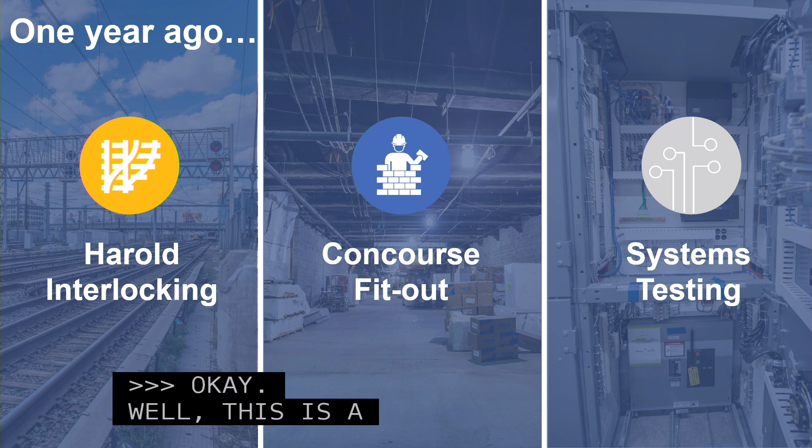Well, this is a year ago, and it was at this meeting a year ago I came to you and reported that, as requested by the board, we'd taken a hard look at the project from a budget and schedule standpoint. The results of that review were not good. The issues that had plagued the budget for years were again threatening to push out the schedule and explode the budget.

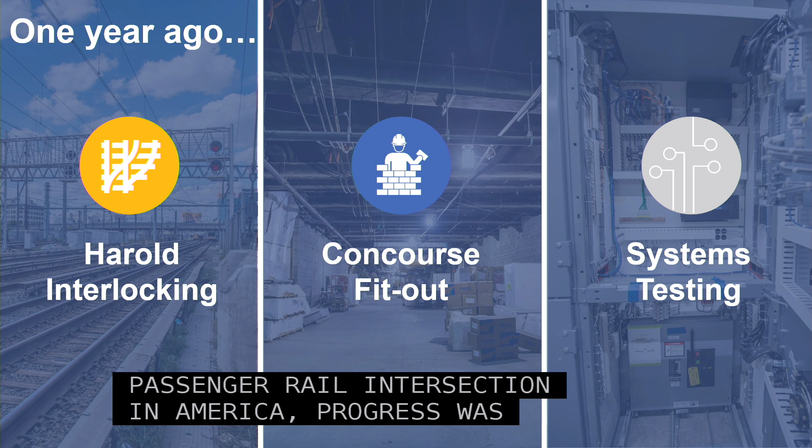Specifically, and to provide a contrast with how far we've come, at Harold Interlocking, the busiest passenger rail intersection in America, progress was stalled, mostly due to Amtrak's inability or unwillingness to provide personnel required for much of that work to take place.

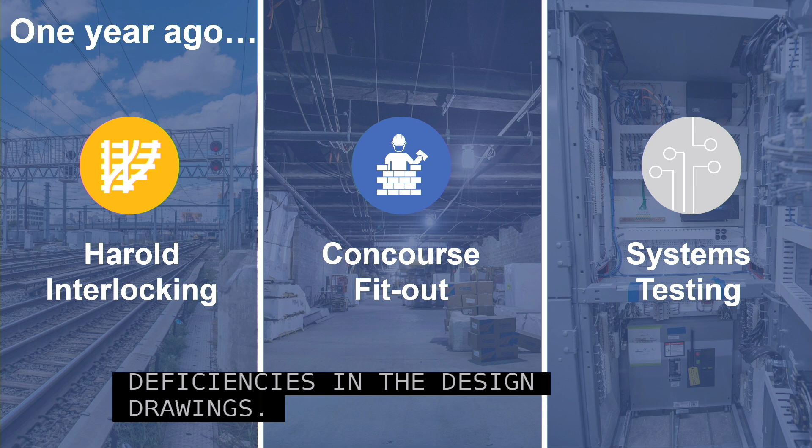Construction and fit out of the new concourse below Grand Central was behind, owing in large part to serious errors and deficiencies in the design drawings. That is a problem that weighs largely on the MTA, and it is of 20 years vintage. It's a very old problem, but with very big consequences.

Vital aspects of the complicated 29 separate systems work, 30,000 separate devices involved in that, was stuck, and as a result, testing was not moving forward as it should. And the lack of productivity and all these schedule delays combined were translating into increased costs.

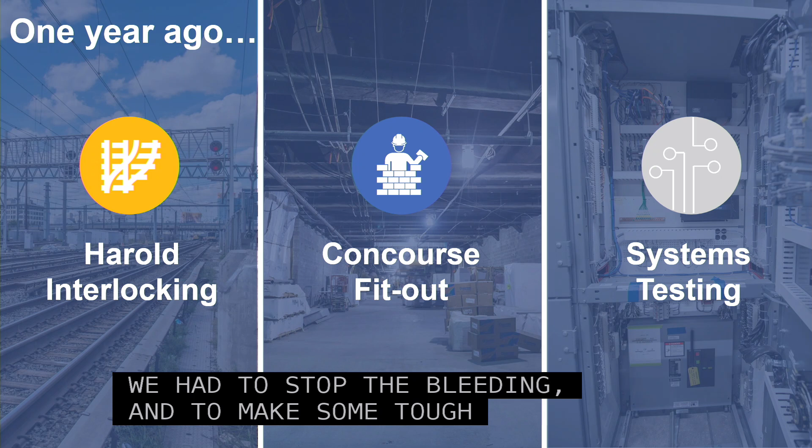We had to stop the bleeding and to make some tough decisions. So after a review and after discussion with the board, we recommended that we recommit to the December 2022 revenue service date, which was under pressure, but which I believe then and I believe now is accomplishable. And we had to acknowledge the cost of some of the problems that I've enumerated.

The plan was met with overall a very positive response from opinion leaders on Long Island. Our new commissioner, Mr. Law, was very much part of our effort to socialize the information about what this project is, why it's significant, and what it will accomplish.

So quickly today, I'm going to play for you a video of the progress in photograph with dates before and after dates, so you can date it.

So in order, as I discussed this morning, we made significant organizational changes to support the schedule, and we detailed the schedule. I cannot emphasize how important this is.

We went from a 15,000 activity schedule to a 57,000 activity schedule. This allows us to really identify all of the issues that could derail the project, however small. So that is a significant step forward.

And I talked to you a little bit about the organizational changes we made, but the results have been significant. We have a 70% reduction in the time it takes to resolve and execute change orders. The backlog of change orders was 500 in number, that I described last year, is down, reduced by 91%.

And the hundreds of submittals that were waiting for review by our team and by our design team for more than 30 days, outdated submittals, have been reduced by 81%. Colleagues, that's an incredible achievement.

Another area of success, and I have to give credit to Amtrak, because we were very clear with you and with the public that Amtrak's failure to support this project, even though we're paying for every nickel of their time and their workforce, was a serious detriment to the schedule. And we called it out, and we talked to them about it, and they have stepped up. It's not perfect, but significant improvements have been made. And the results are dramatic.

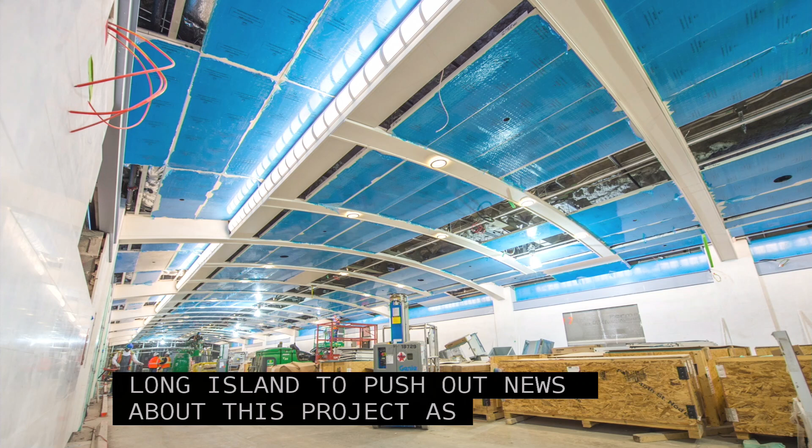People are seeing, as Commissioner Mitzker said this morning, when you see this project, it takes your breath away. Nobody has opened an 8-track railroad terminal in the United States since the early 50s. This is a historic effort. It obviously has a history of challenges and problems, but let us not miss the punchline, which is we're moving towards opening a historic mega facility.

So I want to invite you again to come, and we will set up some times for board members to see it. Finally, I just want to emphasize something that goes to what Pat, the chairman, said at the outset, which is we are taking the lessons of some of the projects that had challenges, Second Avenue Phase 1, East Side Access in the past, and also learning from projects that are going great, like Third Track.

About what we do: we're saying no to scope creep. We are not engaging any discretionary design changes. We've cut back on the red tape, which is how we've accomplished those metrics that I described to you. And we're learning how to better execute all of these projects so that we can deliver for the people of Long Island.

Highlights of the construction progress so far, there's so many, I'm just going to touch on a couple. We completed substantial completion of the 57D Harold Track contract. Today, we are hitting substantial completion for 2 other major contracts, the so-called 006 contract and the CM32 contract. These are 250 and roughly 300 million dollar, and 200-plus million dollar contracts themselves. So we are closing out contracts and hitting milestones on all of the various contracts, so that we're down to just the systems testing and the work in the concourse and a little work in Harold.

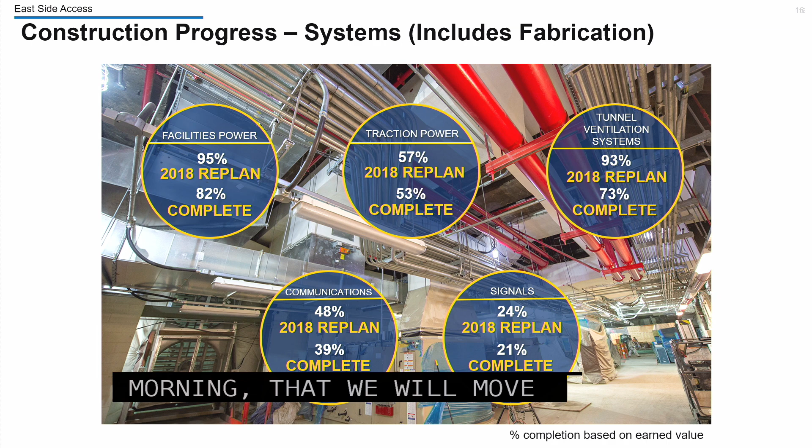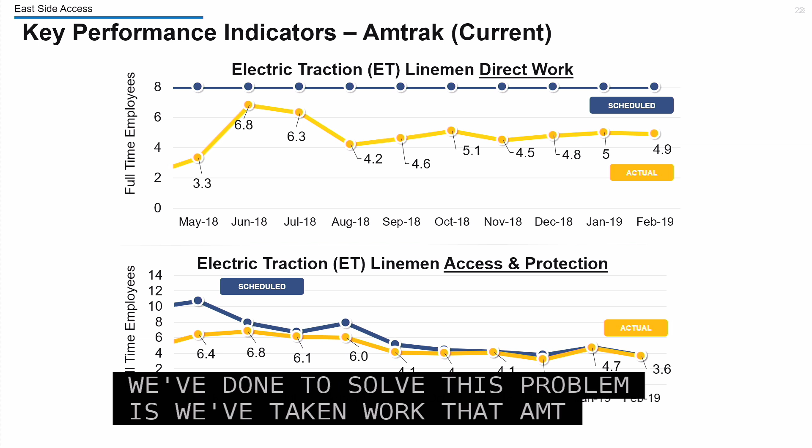Finally, the old trend with Amtrak, I'm not going to get into it, but it's moved in the right direction. We still have a little way to go. One of the things we've done to solve this problem is we've taken work that Amtrak used to insist on doing, and we're taking it for ourselves. We're doing a design-build contract with our own contractors. We were going to pay for it if Amtrak was going to do it, so we'd rather have control of the work, and we've done that with some of the electric traction power work.

Rob, can you comment on the 90-day look ahead? Certainly. So looking ahead over the next 90 days, we will energize 2 additional facility power substations, and these will provide the necessary power that allows system testing to move forward.

Factory acceptance testing of the tunnel SCADA is critical to the fire and life safety system, and it's also an important component of what is the integrated incremental systems testing.

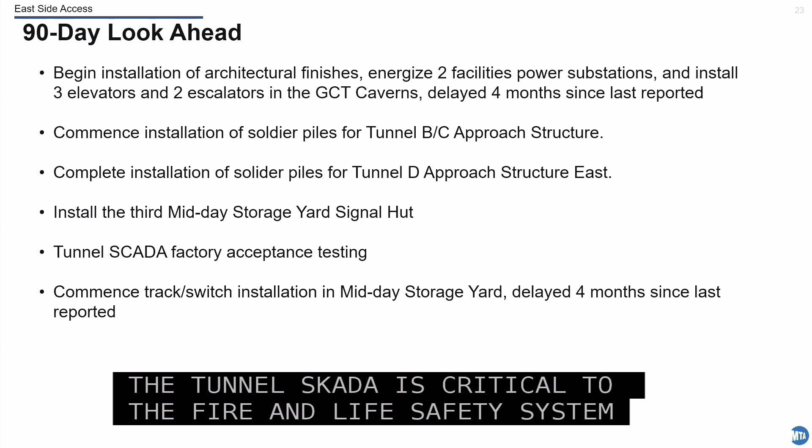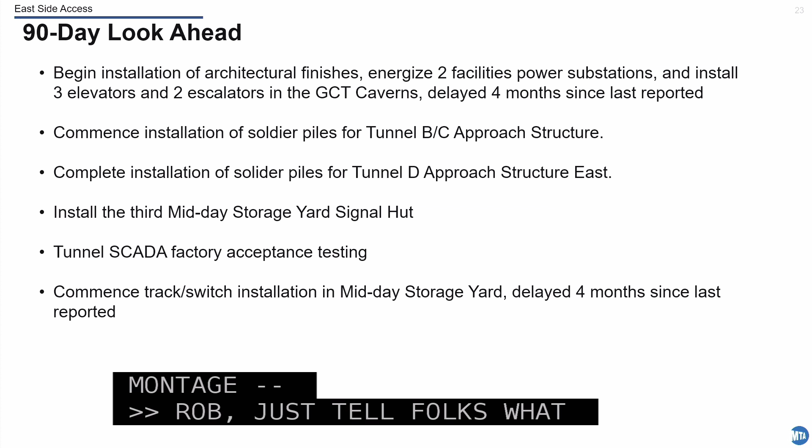As you saw in the video montage... Hey Rob, just tell folks what SCADA is. So SCADA is data information back and forth that provides information to control systems out in the field and provides it back into the control center. So like a traction power substation, you can control the breakers. A signal system, you can control the signal networks through the SCADA system.

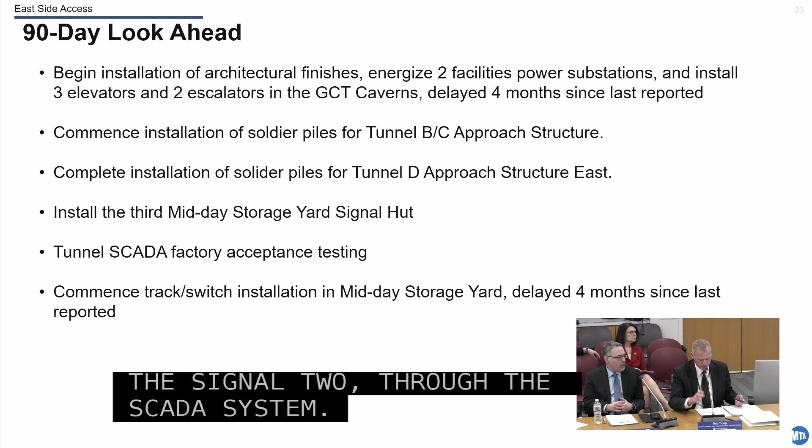And as you saw in the video montage, the installation of tracks and switches in the midday storage yard has now commenced.

So as we presented at the committee meetings this morning, we have negotiated, after a year, modifications with the CS-179 systems and the CM-014B concourse contractors. This takes care of a variety of issues, most importantly, the agreement on the incremental systems testing approach. The approval of these modifications at the board meeting Wednesday provides for a clear path forward to help ensure that we meet that 2022 service date.

For the issues identified here, the board has approved the modifications that will address the start of the Phase 3 incremental systems testing. Moving this prioritized mods forward is a really good example of what the PMO, the program management oversight, brings to the project. When we prioritize the work that is critical, we're able to execute on those priorities in a timely fashion, reduce the risk, and most importantly, maintain schedule.

Delays to the factory acceptance testing of the backbone communication system risk a cascading set of delays to the multiple discrete systems that ride on this backbone, like the SCADA system. We are working very closely with the contractor to mitigate these issues.

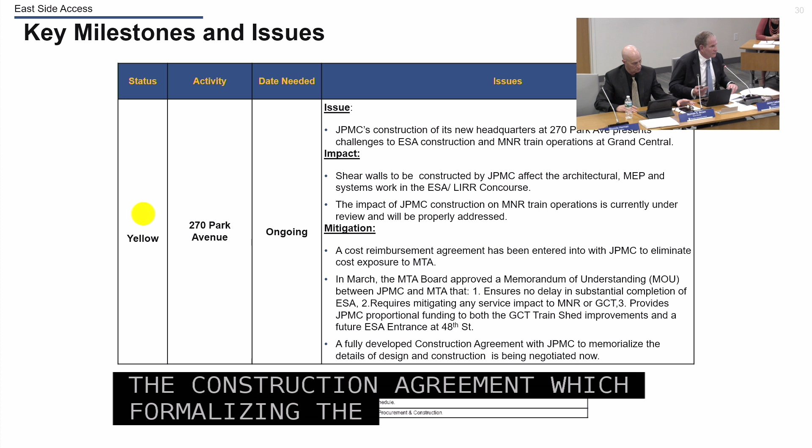The MOU between JPMorgan Chase and the MTA has been approved by the board. I'll just add a note that we've actually advanced it. We now are exchanging drafts of the construction agreement, which formalizes the principles in the MOU, and they've delivered us a much more developed design. So this thing is going forward quickly.

So as we approach revenue service, Long Island Railroad operational readiness and the rail activation plan, in other words, what it takes for Long Island Railroad to get ready to run service, will become a more significant area of focus. As of a few weeks ago, the LIRR now fully owns and has responsibility for the operational readiness and asset management teams, which had previously resided with ESA.

There's a lot of elements to this, and among those are the operational readiness. It's things such as simply the opening day service plan, the maintenance and facility service planning, systems acceptance, public information and communications, the hiring and training of the multiple crafts and disciplines which require Long Island Railroad to run the service. I am pleased to report that's on an increasingly positive track, but that must be maintained and be looked at very, very closely.

But I guarantee you that Long Island Railroad is committed to providing a world-class passenger experience starting on day one of service to GCT, and executing a highly developed operational readiness plan helps to ensure that this is achieved. Thank you, that's our report.

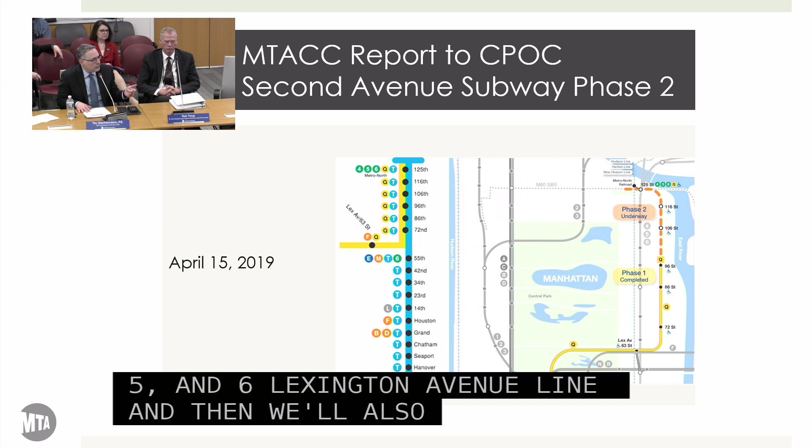So I want to talk about our federal funding and our application for federal funds. The future of this project lies in Washington. We are looking for a substantial amount of federal funding for this project, similar to what we had on phase 1. So roughly around 33%, or a third of the project cost, we've asked for in federal grants.

We started with a $6 billion cost when we entered project development approximately 2 years ago. We developed that cost as a placeholder from looking at what phase 1 cost us, then applying escalation since we had similar construction and scope of work, and we came up with a starting point of $6 billion. Right now, based on our preliminary engineering and some cost pressures and substantial cost containment efforts, the project is somewhere between $5.5 and $6 billion. But we know we're not done with cost containment. We have a long way to go, and we want to get that cost down further.

We're carrying a goal of a federal funding agreement as early as the end of 2020. We've completed our supplemental environmental assessment and received the finding of no significant impact this past November. We've submitted documents to the FTA to support their risk assessment and their evaluation of our readiness to enter the next phase of engineering. We're thankful for the strong support from our local New York delegation and congressional representatives, especially Congressman Espaillat, who's dedicated to seeing this project get the federal funding it needs so we can move forward into construction.

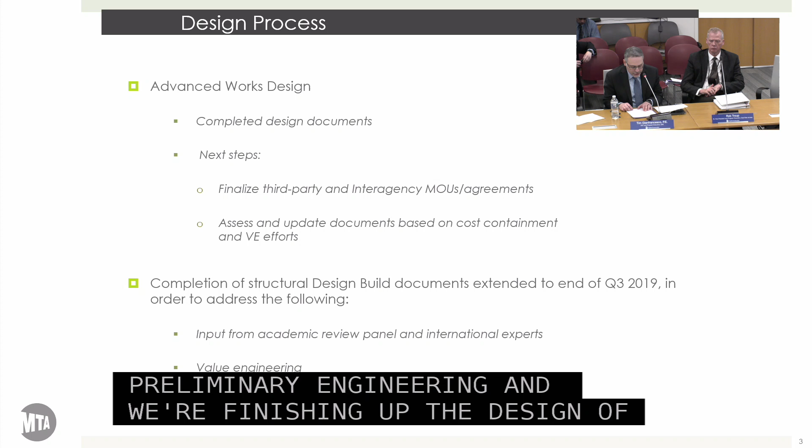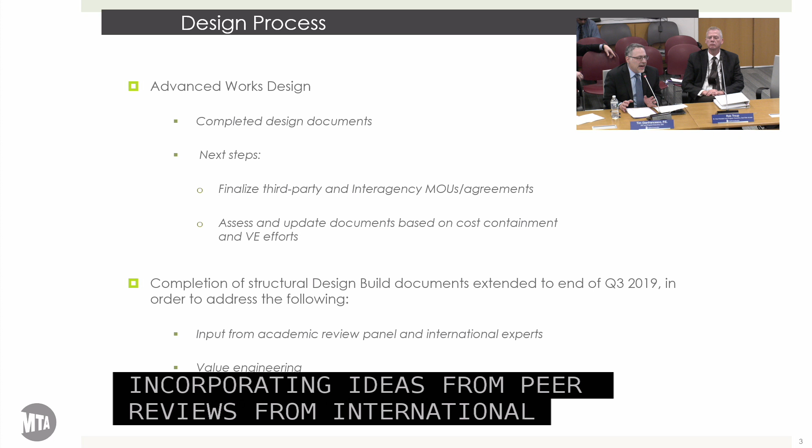Since we restarted design in 2017, we've completed preliminary engineering and we're finishing up the design of an advanced works package and an early utility package. We're now focused on incorporating ideas from peer reviews by international experts, our value engineering efforts, and engaging with the academic review panel. We want to make this project less expensive, but just as effective.

Now to some of the good stuff. One of the major cost containment ideas we've advanced during preliminary engineering is the reuse of the existing tunnel section that was constructed in the 1970s for the 116th Street station.

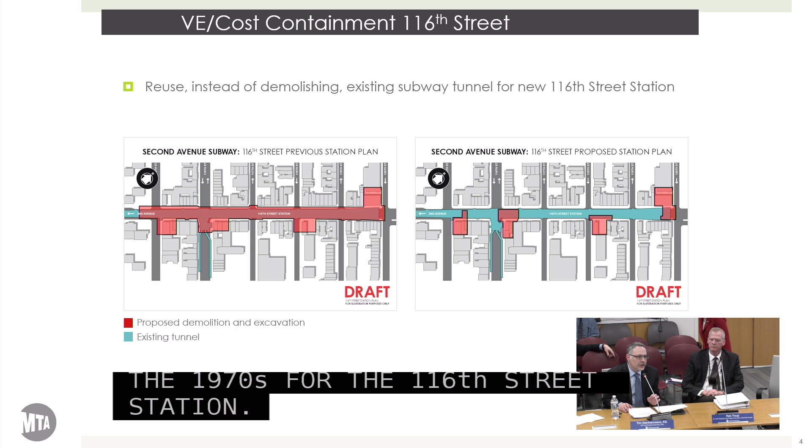What you see there is a picture. On the left-hand side is the original preliminary engineering concept for the 116th Street station — basically 5 blocks shown in pink, representing excavation and demolition of the existing structure. On the right-hand side is the new concept we've developed and will develop further in preliminary engineering, where we can maintain and reuse most of the existing box, with the pink areas showing where we connect into the box with new entrances and new ancillary structures.

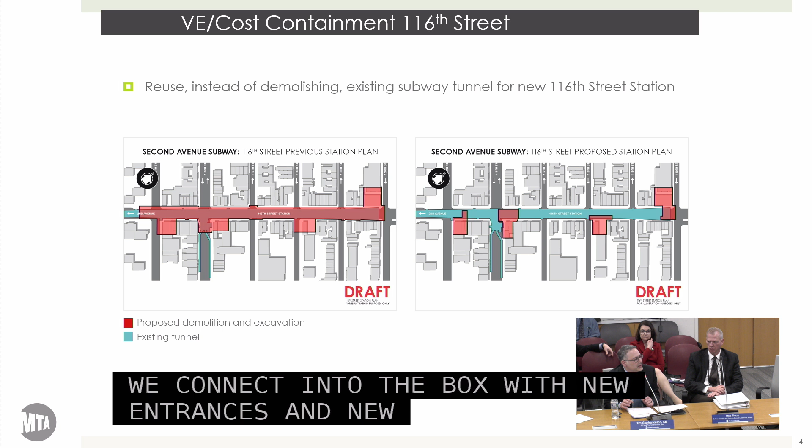We were able to do this because back in the 1970s, when they constructed that existing box, they were anticipating being able to inspect the trains along the route. So where they installed an inspection track in the middle of the two existing running tunnels, we figured we could fit an island platform in that spot. Since we don't inspect trains on the right-of-way anymore, we can fit an island platform right there and do some reframing. We'll have some columns within the station, which is a departure from previous Second Avenue standards, but we'll be able to minimize the excavation — probably the most expensive activity we do when building these new tunnels and structures.

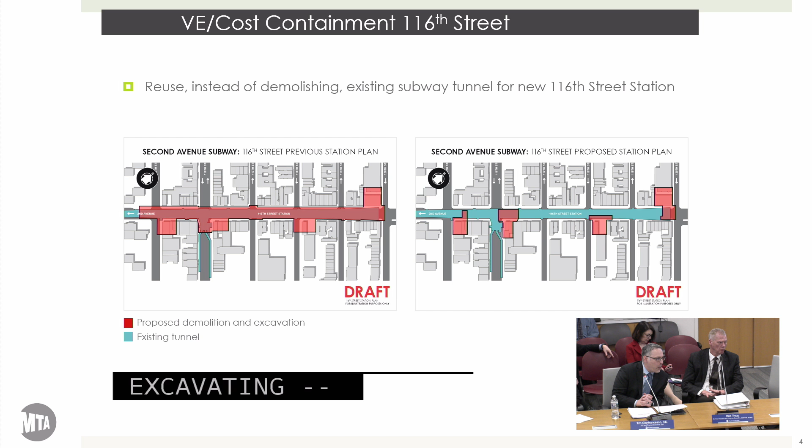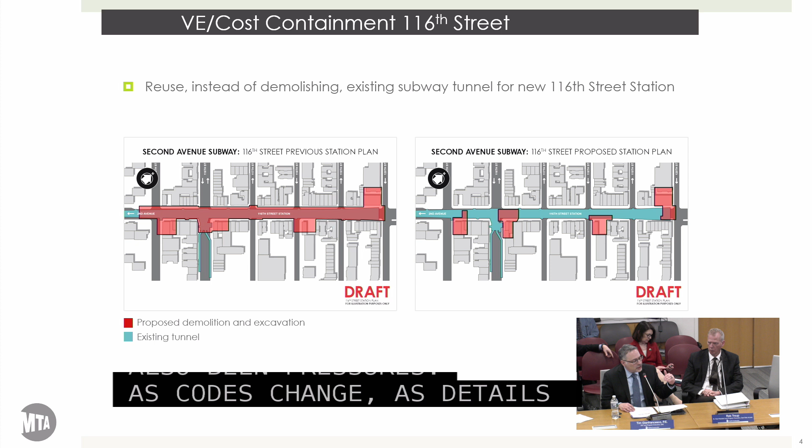So, Tim, I'm curious — great stuff — how much do you estimate the cost savings to the MTA from these improvements or this new approach? Hundreds of millions. This particular issue, we believe, is in the area of $500 million. And that's on top of the additional reduction in scope you've already achieved? Yes, there's been reductions. There's also been pressures as codes change and details change — the project is always fluctuating a little bit up and down.

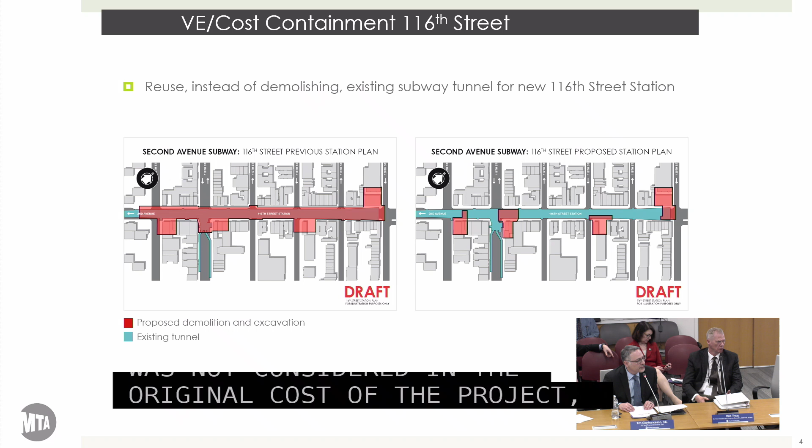So this is something that was not considered in the original cost of the project, these savings. I'm just curious, last question — what's your ballpark estimate as to the savings to the MTA from using the existing tunnel and the other things you've done? Close to $1 billion. It's pretty good.

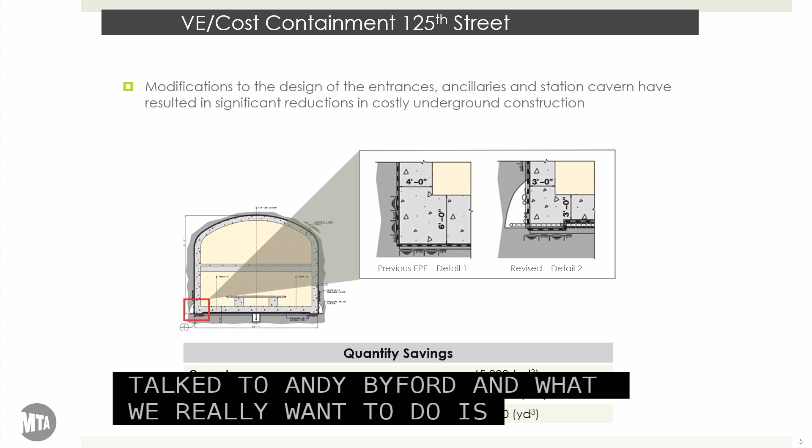Thank you. And at this stage, I've talked to Andy Byford, and what we really want to do is put all of the transit discipline professionals and the team together to really hack away at scope and try to bring the cost down further. This is consistent with our cost containment principles — simplify, decustomize, use off-the-shelf solutions, and generally reduce scope. So this is the moment, while we're waiting for the federal funds, to hopefully do that.

Tim, did the 1970s version of this tunnel always envision an island platform at 116th Street? The 1970s version didn't envision a station at 116th Street at all? At all. They were going to bypass an important crosstown street like 116th Street? They were going to bypass it.

It was in 2004 when we restarted the design and concept of Second Avenue Subway that we identified a station at 116th. And the last question is, do today's and future car types allow for the same clearances as what was allowed for in the 70s there? Yes, absolutely. We meet all of today's standards on the new design.

So the last slide I have is another roll-up, an example of the savings we've achieved at the 125th Street area. This is a general slide to show we've addressed entrance designs, ancillary system designs, and the design of the cavern itself to minimize the amount of excavation. In particular here at 125th, this is all rock excavation.

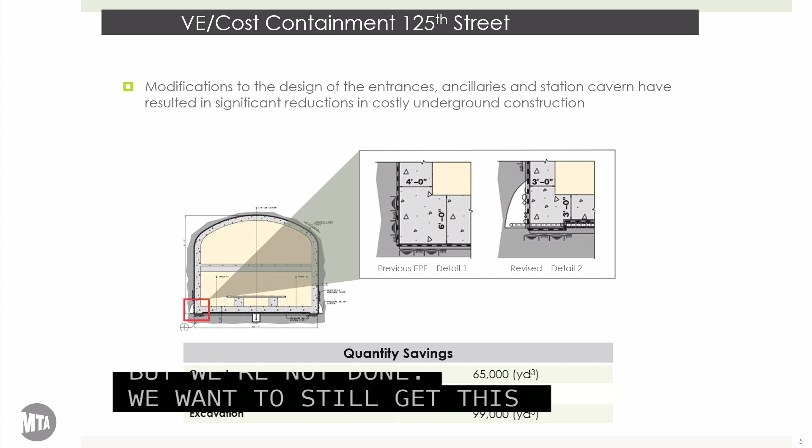Good afternoon, Mr. Chairman. I have a couple of remarks summarizing our observations on this program. First, the project has maintained its goal to complete the federal funding process by the fourth quarter of 2020. They've done that by completing the key submissions of required project development materials to the FTA last month, and by setting a schedule for completing a readiness review for starting engineering by mid-year. Secondly, the proposal we just discussed to fully reuse the existing tunnel really demonstrates the project's commitment to an aggressive cost containment program. Those are my remarks.

What's the IEC's value added on this project over this kind of period of time since the last CPOC board meeting?

Good question. Certainly we've had several points of influence. I'll start by saying floor space is one of the more generally understood drivers of cost in this kind of construction. Our observation of the development plans last June found that a significant amount of space was being allocated for transit user group operations, maintenance, and support facilities — back office, as it's commonly termed in our business. We raised some questions, and then recommended that be looked at again under closer review, since in this particular case at 125th Street, we thought there were opportunities above ground for those sorts of facilities, or even at 96th Street, the existing terminal, once it becomes reconfigured as a line station instead of a terminal.

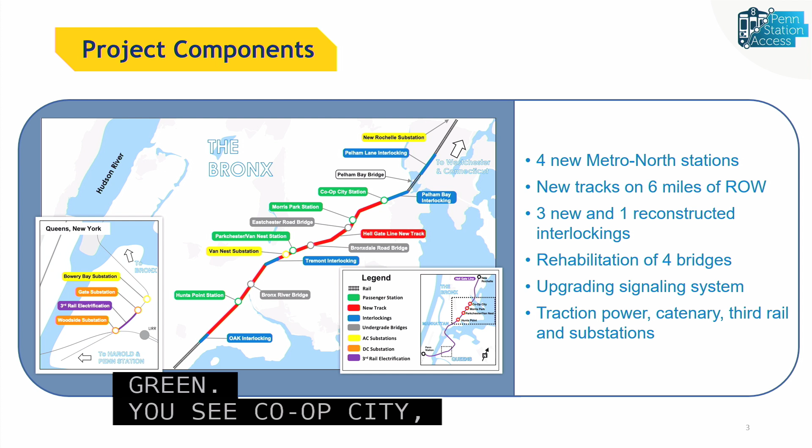In order to accommodate these stations, we'll need to add additional track. The red line is the 6 miles of additional track that will be added as part of the project. Also included are a number of new interlockings, which will allow us to connect back to the original rail. Part of this project will necessitate additional power and signal work, all of which will be included.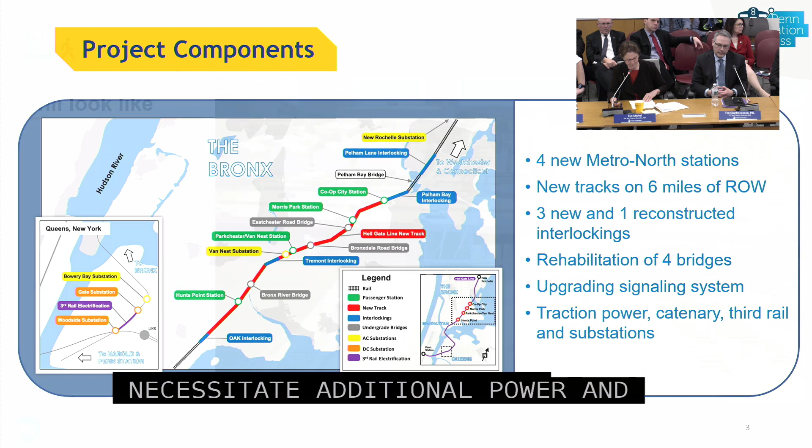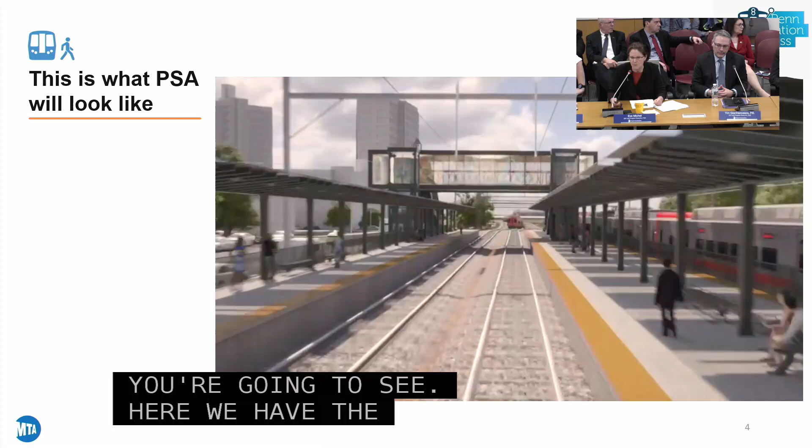So this is a sneak preview of what you're going to see. Here we have the Metro North train coming into the Co-op City station. Above you is the pedestrian overpass that customers will use. As we turn around here, a passenger arriving at the station will come and access the platforms.

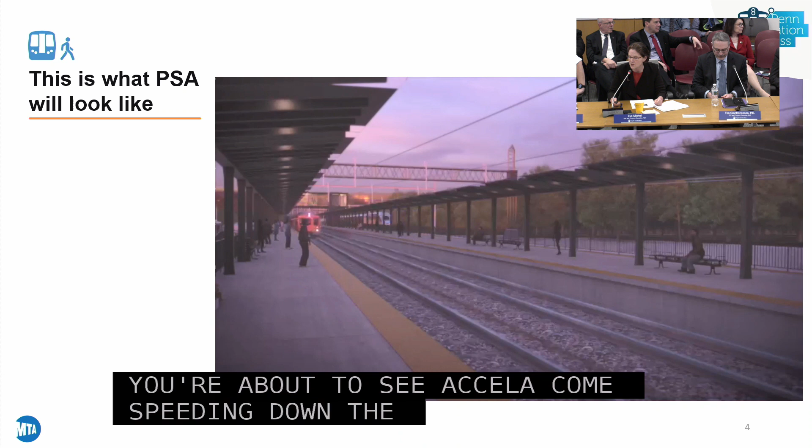If you look up, you'll get a preview of what some of the artwork might look like in the station overpasses. This is an active Amtrak right-of-way. You're about to see an Acela come speeding down the right-of-way. And here we have our M8s coming to collect passengers. Our passengers from here will either go into New York City or, as mentioned, up to Connecticut and Westchester.

This is an exciting time for the project. We've actually had a lot of major accomplishments. We have signed the Memorandum of Understanding with Amtrak. This was hard won, but it has allowed Metro North permission to travel along the active Hell Gate line, which is an Amtrak right-of-way.

We've also gotten the MTA approval for the general engineering consultant contract. We've started work with HNTB on this contract, and issued them a notice to proceed on February 12th. We've also started having our key stakeholder kickoff meetings, meeting with Metro North, Amtrak, and Long Island Railroad.

We're starting the actual work. Survey work started on Friday and has continued over the weekend, both on the right-of-way and on the adjacent areas. As part of the survey work, we're using LiDAR equipment, which will allow us to capture information used and translated into the project documents. This will feed the BIM, the 3D drafting, which will become part of the project components.

A few words about the stakeholders. This project is being run, as you know, under the auspices of MTA Capital Construction. Our key stakeholder clearly is Amtrak because this is their right-of-way along the Hell Gate line. Metro North is our client; they will be activating these 4 new stations in the Bronx for their customers. This is the first major expansion on the Metro North Railroad in many years.

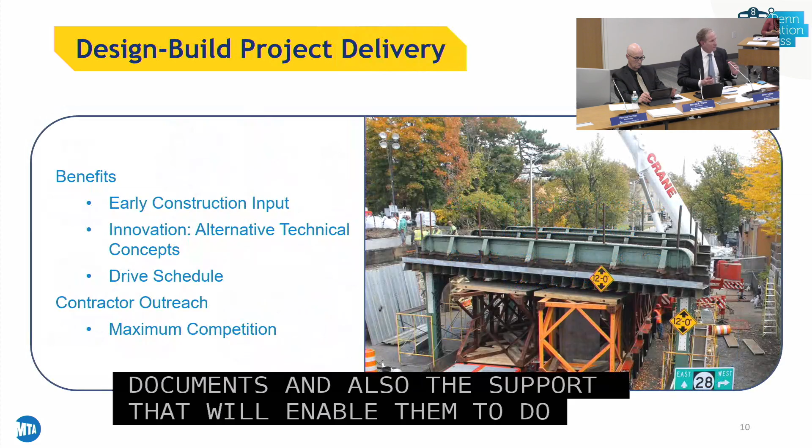Just to remind you, submittal turnaround time was such a big deal because the volume is so great. Now we're dealing with an outside agency that reviews all the submittals, Amtrak. So we're trying to work with them to see if we can help expedite their reviews by providing both the caliber of document and the support that will enable them to do it, and this kind of over-the-shoulder dialogue, which cuts short the back and forth that frequently is part of the submittal review process.

Sorry, I thought I could get back to that slide.

We also are going to be driving cost containment principles that have been talked about to the MTA board. In particular, we're going to do tight management of scope. This will allow us to drive schedule, but also to contain the costs as we move forward.

We recognize that this project has many complexities. We're working with a new railroad, and we're also within this high-speed right-of-way. We are going to do this through the project design-build project delivery system, and there are many benefits for us. We are going to be able to get early construction input from the construction community. We will enjoy some of the innovations we can learn from them with the alternate technical concepts, and we're going to use this to drive schedule.

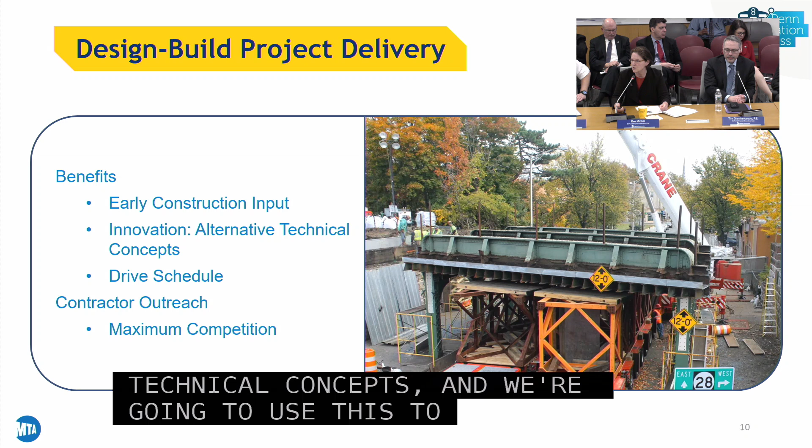We're also starting now with the RFQ. We're going to be preparing and issuing an RFQ at this early stage so that we can go out to the contractor community. It's extremely important to us that we maximize competition for this project.

We're already thinking ahead on how we're going to phase the construction itself. One of the key activities here is to minimize Amtrak's disruption as well as Long Island Railroad's, since they're both on this active right-of-way. We're talking about track outages to accomplish that, and we're also doing some modeling to see whether or not there are single-tracking opportunities available as we move forward.

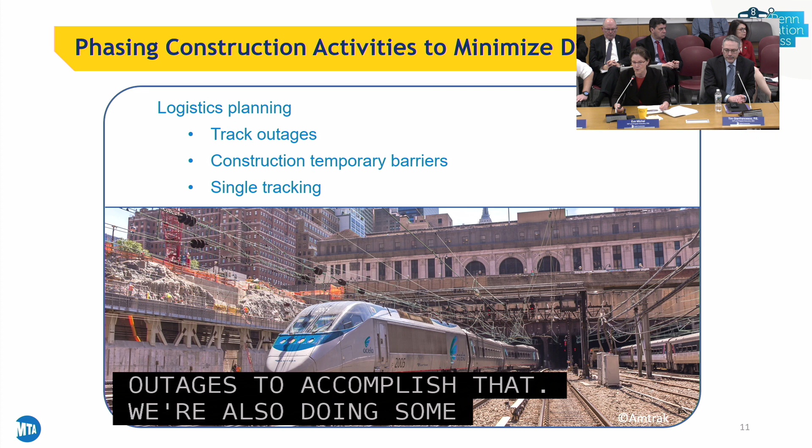Community outreach, sorry? In the opening of this particular project's pages, it mentions traction, power, catenary, and third rail. You're not going to install third rail for this route?

Yes, actually we are. As we enter into Harold, there is a phase break there. Amtrak travels along at 60 hertz, and then they transfer over to 25 hertz as they go through the East River Tunnel. The M8 equipment is not able to make that transition. The M8, however, does have a shoe with an overrunning capacity that needs a third rail. So that juncture, a mile-long juncture as you enter into Harold, will need to have a third rail to bridge that phase break. So that would be the only section of third rail. That's correct.

Incidentally, that also will necessitate DC substations in order to facilitate the third rail.

So a little bit about... yes? Are there no plans to upgrade that 25 cycle section so it can be the same as everything else? Well, Amtrak's equipment does allow both 60 hertz and 25 hertz, whereas the MTA equipment does not.

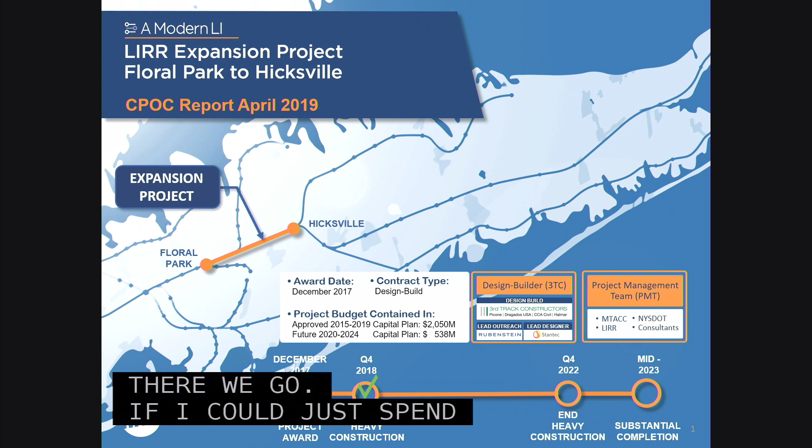If I could just spend a few minutes reintroducing the project to the board members that may be new: it's 9.8 miles in Nassau County. It's got 7 stations, 7 undergrade crossings are going to be built. I say a lot of 7s. There are 3 or 4 new parking garages to be built. It is due to be completed in construction in October of 2022. We started our construction back in October of 18. We have 4 years to do the construction, and that's the commitment we've made to the local community.

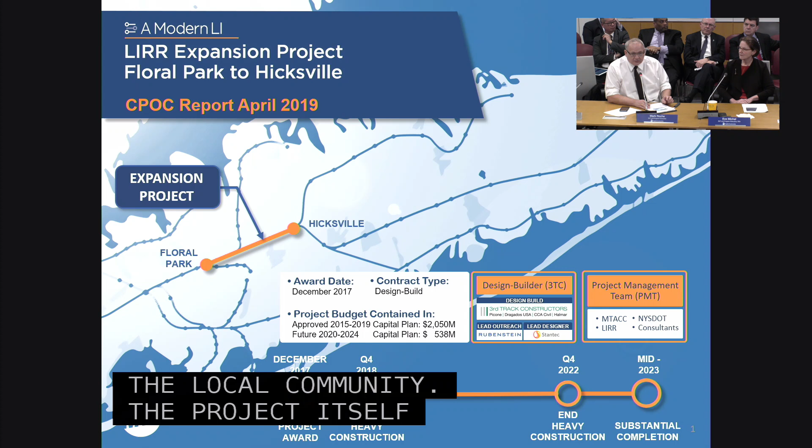The project itself increases the capacity of the double track by adding the 3rd track by 45%. That's a huge increase. But not only that, it provides the ability for reverse commuting in the corridor, which is not possible right now. Those are 2 major benefits of the project. As you can see by the numbers, October 2022, we're finishing at approximately the same time as East Side Access. Total project cost is $2.58 billion, of which $538 million is in the next capital plan.

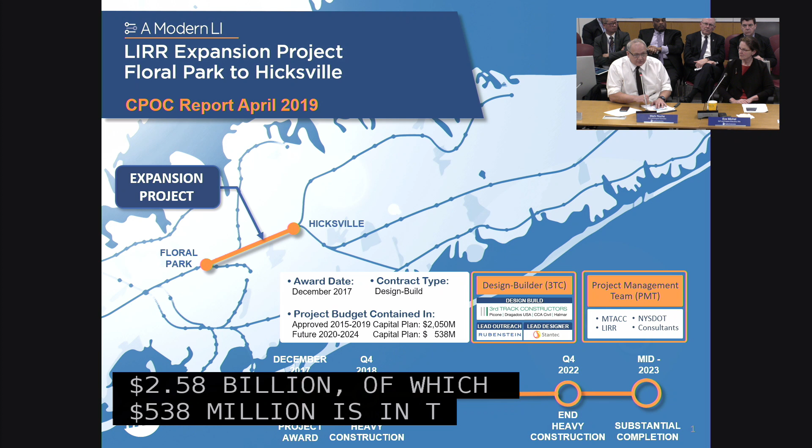That is beginning to be an issue. I'll highlight some of that as we go forward. $2.05 billion is currently funded, and that work is well underway. $270 million of that future funding is allocated to the design build contractor, 3rd Track Constructors. Our contract requires that amount be awarded before July of next year to make sure we stay on schedule and on budget, and I'd like to remind the board about that.

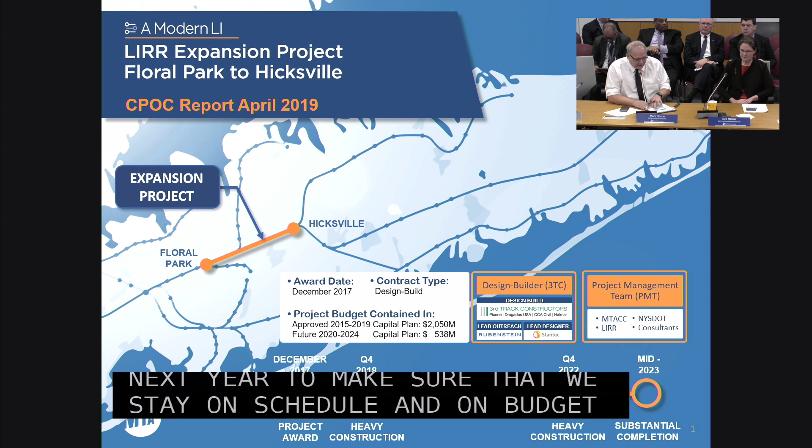A couple of namings so that you're familiar as I go through this. 3rd Track Constructors is a consortium of 4 contractors and many designers. I won't go through their names. We use the phrase PMT, Project Management Team, that encompasses all of the agency, DOT, and all our consultants that are supporting us as we go through.

She got it, she's got it.

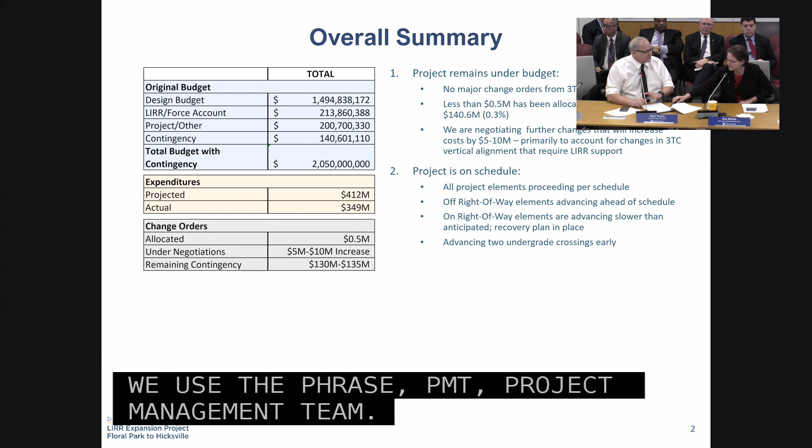Yelena's doing it. Okay, so I'm pleased to present that we are on budget and on schedule. In fact, we are very low on change orders across the whole of the system. We have less than 1% of our allocated budget for change orders necessary at this present time.

We are seeing some means and methods issues from 3rd Track Constructors that are telling us we will need support from Long Island Railroad with more force account or more track raising over the years ahead. So I'm saying there's $5 to $10 million for changes that are going to occur. But in general, of the $140 million in contingency that we have, we've only allocated about 1% of that at this stage. The contractor is moving ahead. I would characterize it as aggressive. They are very detailed and very precise. They've got some very good team members.

We are hoping in the next few weeks to make some changes to the contract that will help them get further ahead on the schedule. I'll talk about that in a moment.

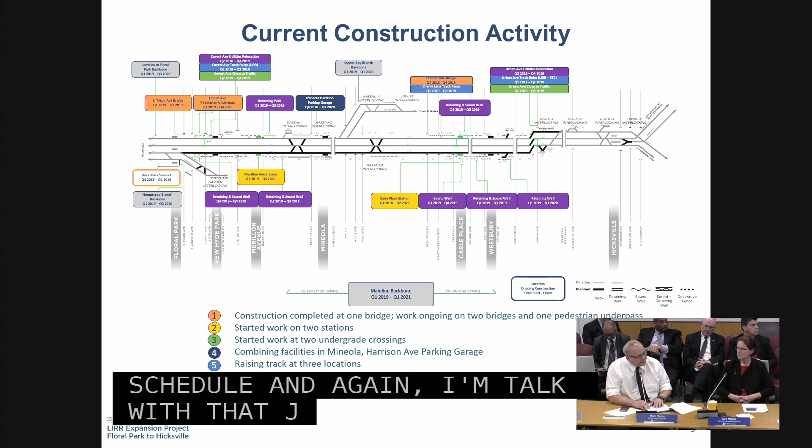If we look at what's currently going on out there right now, I won't go through this in great detail, but I'll give a little summary. There are 3 bridges that we've started this year. One is already complete, which is nice to say. Two more will be complete this year.

We have started work on 2 undergrade crossings. The first was at Urban. The second, which started this morning, is at Covert, and I'm pleased to say that the traffic diversions planned for the closure of that road worked out extremely well today.

We've started work at 2 stations, Merillon Station and Carle Place Station. We've restricted the contractor to work at only 2 stations. If we add a 3rd station, we figure we may get to the point where we affect service, and we don't want to do that. We will watch that as we go forward.

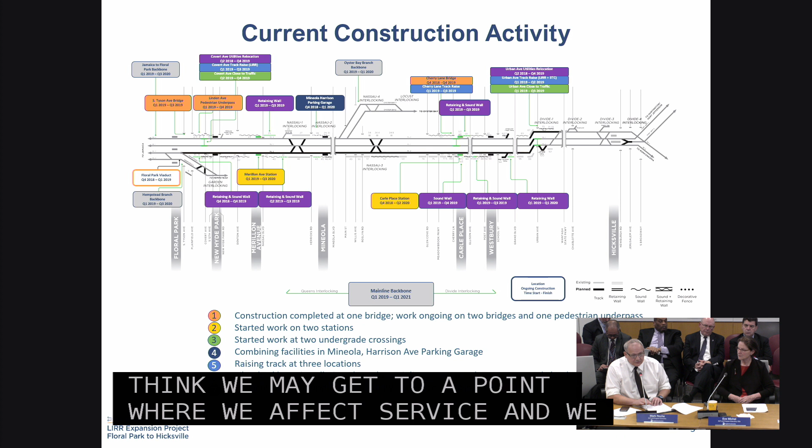Long Island Railroad have a lot of work going on out there right now. They are raising tracks at a number of locations and relocating utilities in many locations. We are seeing, to keep on schedule, that using Long Island Railroad forces as they become available is actually quite an asset to the project, to make sure we're using all the resources that are available.

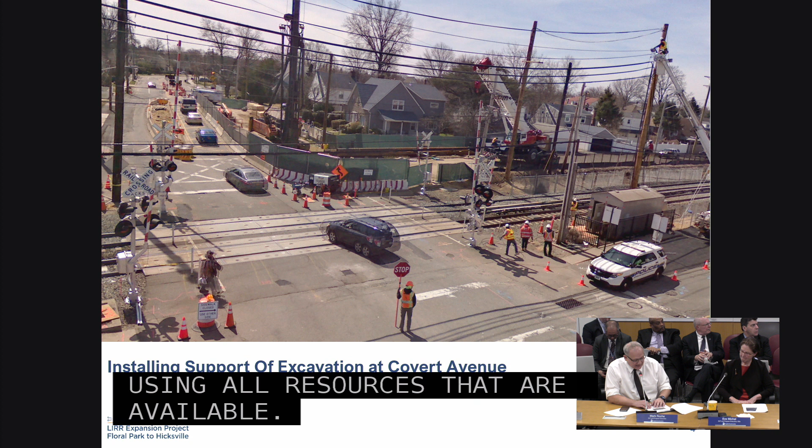Just a couple of photographs of progress out there right now. This was last week at Covert Avenue. That road closed this morning, again with no traffic issues.

I've used the word aggressive regarding 3TC, and I think this illustrates it well. Third Track Constructors only have 6 months to get this road open. By this date in October, they must have that road back in place, or they will be punished with liquidated damages—or if they finish early, we have incentivized them. You can see in the photograph they've got lots of rigs. They've already contained some of the traffic to start getting ahead and putting in some of the piling in the ground to move forward. They are looking at all times at those LDs, driving their behavior, and I am very pleased to say they are well ahead of some of these construction requirements.

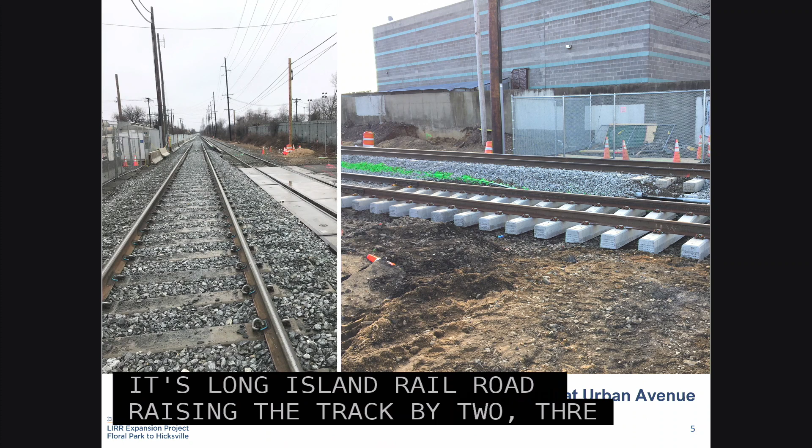The second photograph is a simple one, not sexy, if I could use that phrase. It's Long Island Railroad raising the track by 2, 3, or 4 feet in a number of locations, but it's actually extremely important. By raising the track we can eventually raise the road that goes underneath it, which means we don't have to spread out and bring that road back up as far into the community. So Long Island Railroad's work to raise the track as much as possible, to take advantage of the space and geometry we have, is saving impacts to the community, which is very good to report.

I like this photograph very much. This is Urban Avenue, 1 week after we closed the road on March 9th. One week, and we're already down to the level of where the new undergrade crossing is going to be. Third Track Constructors, particularly the crew on the undergrade crossings, is extremely aggressive.

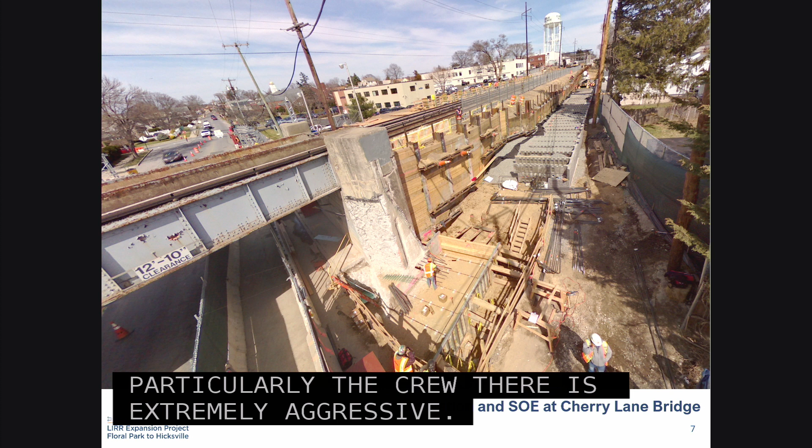We'll come back to this photograph later, but what it shows is the bridge on the left, at Cherry Lane in the town of North Hempstead, which is the first bridge to be replaced—lifted out and replaced—and that happens on June 1st. We have 9 double track closures coming up this year, which is extremely unusual for Long Island Railroad, and that's something you should be well aware of.

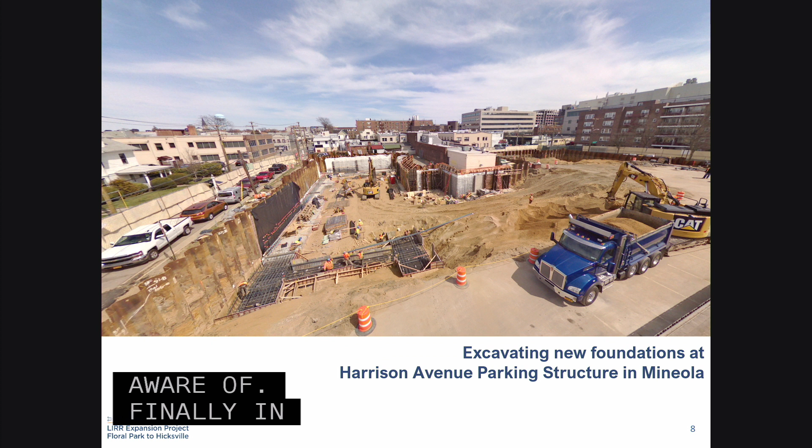And finally, this is a view in Mineola of the parking garage under construction there. We have completed all of the sheet piling around the parking garage, and we've now lowered the ground down to the basement level and are starting the foundations. The rule in parking structures is that once you get to the foundations and start your reinforcement, you've got 1 year to go. So we've got 1 year to go.

So a little bit on schedule, if I could spend a little time on this. In January, when we met last time, we were pushing third track constructors to get much more detail on their schedule. We've been through 6 iterations of the schedule, and I am pleased to report that we now have a very detailed, and I am very confident in the schedule that we've got.

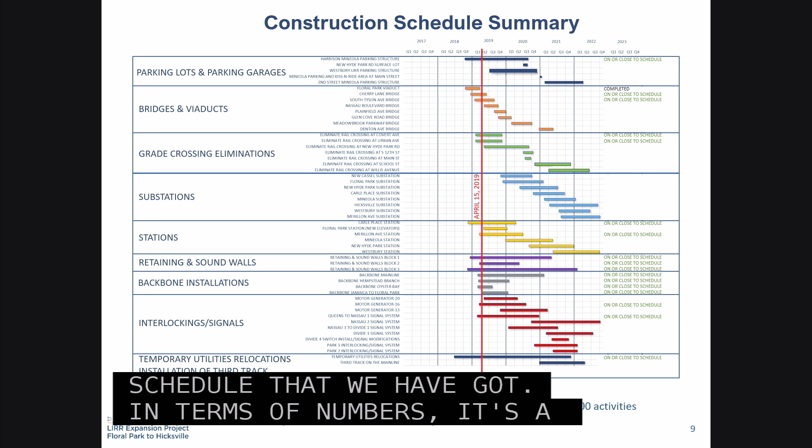In terms of numbers, it's a 30,000 line schedule. It's very detailed. I think we have a little more to go. What's very pleasing is that all of the primary sub-consultants and subcontractors' schedules are all built into that 30,000 line schedule, so it's extremely detailed. But it's telling us a number of things.

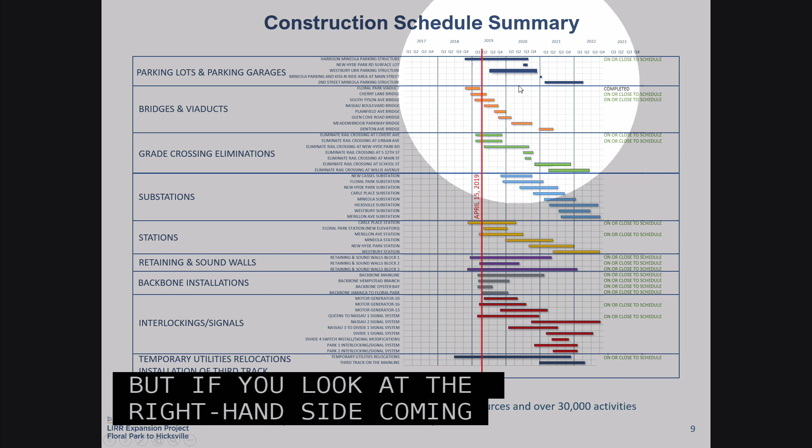If I look at the red line on the screen there, all of those activities that are meant to happen are happening, and you've just seen photographs of those. But if you look at the right-hand side, coming down the line, in 2022, there are too many activities near the end of the schedule. There are too many activities at the end of the project that indicate to me we're putting ourselves at risk. So our task is to modify the contract, to work with our contractors, to effectively bring forward as many of those activities as we can.

I'll take a couple of them as an example. The one at the very top shows the parking lots and the parking garages. There's one activity that is extended into 2022. We're working to bring that back by a year so it won't become an issue by the time we get to the end of the project.

If I look at the grade crossing eliminations, there are 2 grade crossings there, School Street and Willis, which don't happen until the next phase of the project, effectively financed from the next capital program. We think that's a major risk. Given that there's been an accident there, and a tragedy there 3 or 4 weeks ago, we want to take advantage of the unused contingency to finance those 2 grade crossings and make them happen early. We think that is a major benefit if everybody agrees with that.

So you're saying there's no reason for that elimination to wait till the end, because you can do it earlier, and we've had multiple accidents at that School Street crossing. Correct, yes. There's more benefits than just safety. But absolutely, that's absolutely smart.

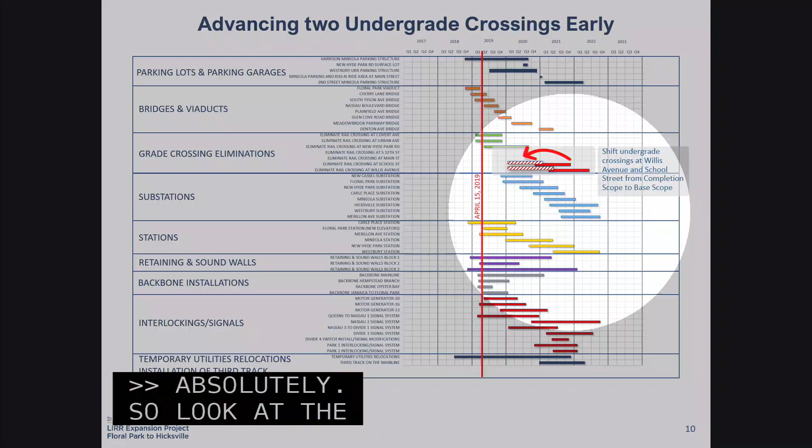If I look at the substations, you can see that there's a ripple effect through the contract. Really, that's because most of those substations are financed from the next capital program. It would be very nice if we could advance the monies for the project so we can move some of those forward. You can see their end date comes near the end of the project. I can go through the project with this type of view in mind, and I won't go through it all, but suffice to say our intention is to look at it this way so we're not just looking at day-to-day activities, we're looking at the overall bigger picture.

Sir, are you monitoring, this is elementary, but are you monitoring all your subs, especially those you're waiting for deliveries from, to make sure they're on time?

We're monitoring our subs, each sub at about 3 different levels. We find it insufficient to just work with the project manager on the sub. We go and visit. We're not only going to visit, but we're also pulling in their CEOs and executives to make sure they know us personally and feel obligated to deliver the project. So we're tackling them at many levels.

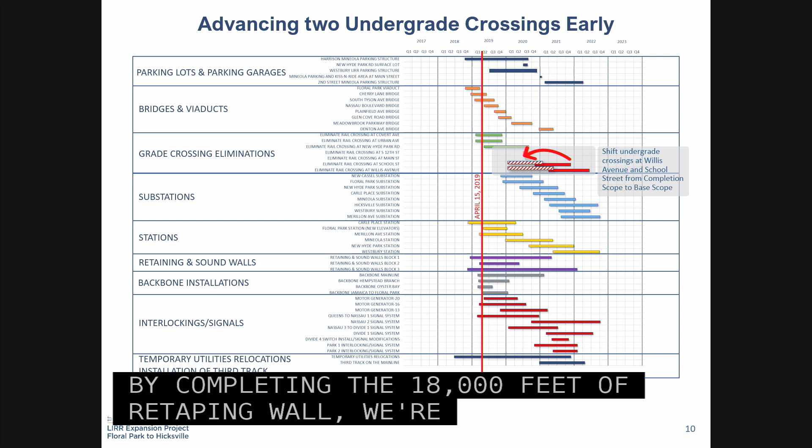The critical path of the project is really the last 4 boxes on this sheet. It's a bit of a dance, a ballet between retaining walls, utilities, interlockings and signals. To give us some measure of our progress, our target this year is to complete 18,000 feet of retaining wall. By completing that, we're effectively building the land upon which to build the third track. So this year we must finish 18,000 feet of wall or better to stay on target. That's the simple way of looking at that part of the schedule.

If I could move on. You're going to get it done, Mark? Yes, we'll hopefully beat it. Thank you.

Normally, typically, Long Island Railroad only has 1 double track outage in any given year. To do 9 in 1 year is a bit of a leap. It's a specific strategy we've done to try and get the project completed on time. So just be aware that's something new.

I want to make clear, we do have a mitigation plan for customer impacts, which is new. Instead of just running buses along the route, we're going to be connecting people to other stations, and we're going to get out in the communities, make sure people understand this is the closest branch, and the bus or van will take you there so you can take a train into the city or whatever. So it's a new strategy, and we think it is both more efficient and better for the customer.

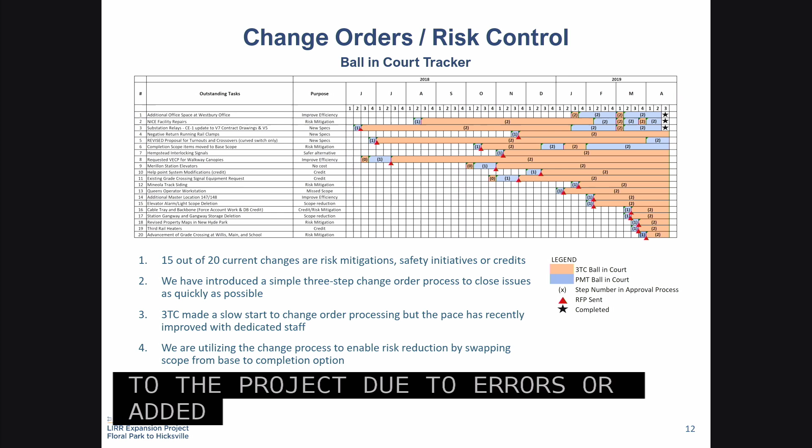But these are not changes to the project due to error, or due to added scope. These are changes that we want to make to be flexible and make the project better. And if I could turn the sheet to give you one example of that — this is an idea that's come from third track constructors.

And it's a great idea. We've worked with Mineola, the space is appropriate. It's in between 2 tracks, it'll never be used for anything else. It's a great idea, and it's an improvement to the project. And it's the kind of change that design build allows us to do with no consequences to us. In fact, it's a huge benefit to get all of our services and all of our utilities, all our support teams, into one area.

And there are lots of these types of ideas continuously going on in the project. Design build is giving us room and method and time to make lots of improvements to the project as we go. It is a wonderful tool.

Excuse me, Mark, when you say to make it better, does that mean the project's going to end quicker, or these are just new ideas that are going to enhance the overall project? I'd say it's the latter. It's enhancing the project, but at the end of the day, by having all of our crews at one location — less maintenance, less toilets to clean, whatever we need — it's actually quite a long-term benefit for us as well.

But Mark, you should make it clear, this is associated with expediting the 2 grade crossing eliminations, the Willis Avenue grade crossing eliminations. So you see up there this is the same area where it crosses not only the main line but the Oyster Bay line as well. Yeah, there's lots of improvements that are overlapping, I'll put it that way. That will, Commissioner, save time.

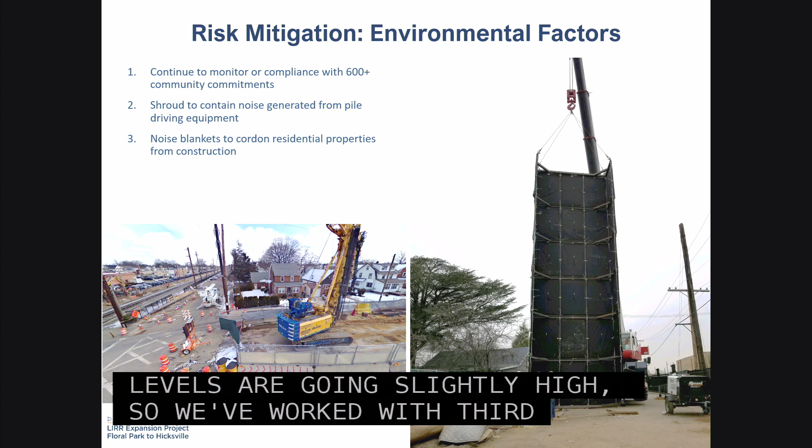Look, one of the factors is we're recognizing some of our noise levels are going slightly high. So we've worked with 3TC to build what's on the right there, a 60-foot noise shroud to hang around all of our piling equipment to bring our noise back down to levels we committed to. It's just another example of the change happening on the project.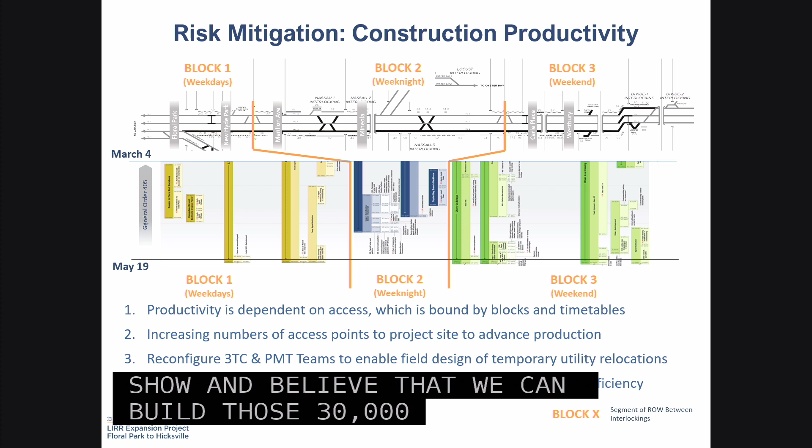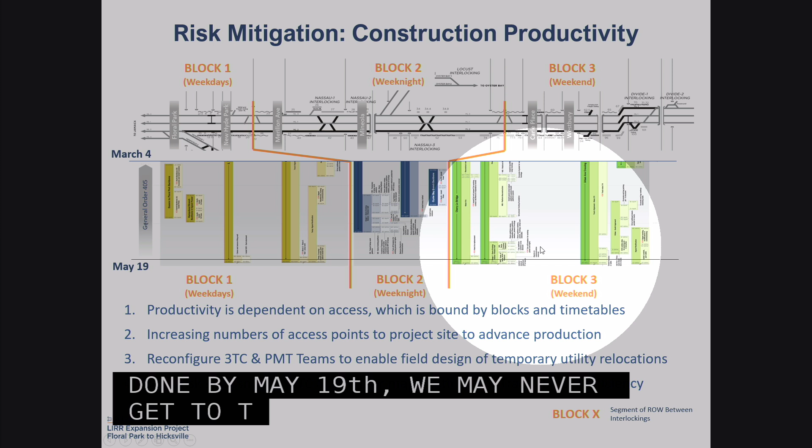So what we're doing is digging into every single line on that schedule and preparing what's essentially called block thinking. There's a nice circle on the diagram - if we look at just one block, for example on the eastern end of the project, that graphic shows all of the work that happens in that block between March 4th and May 19th. If we don't get all that work done by May 19th, we may never get to that block with a weekend closure for another year. We must finish that work on May 19th, or we can't meet all these deadlines. So every 6 to 8 weeks, in this case 75 days, we have a major deadline we have to meet to actually make this work. This block thinking is fundamental to the success of the project.

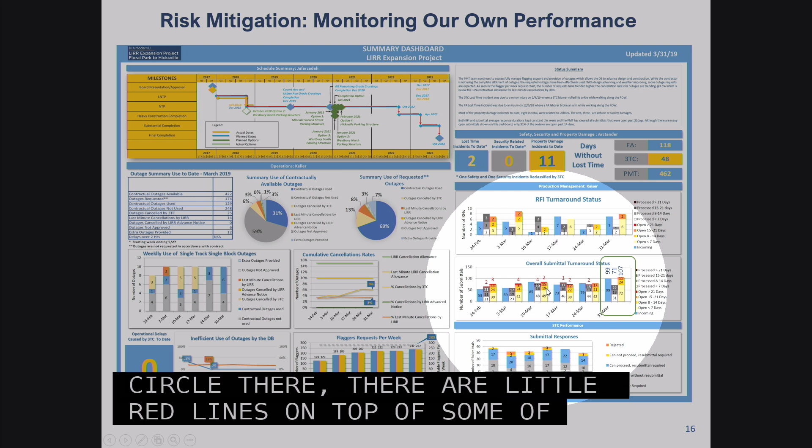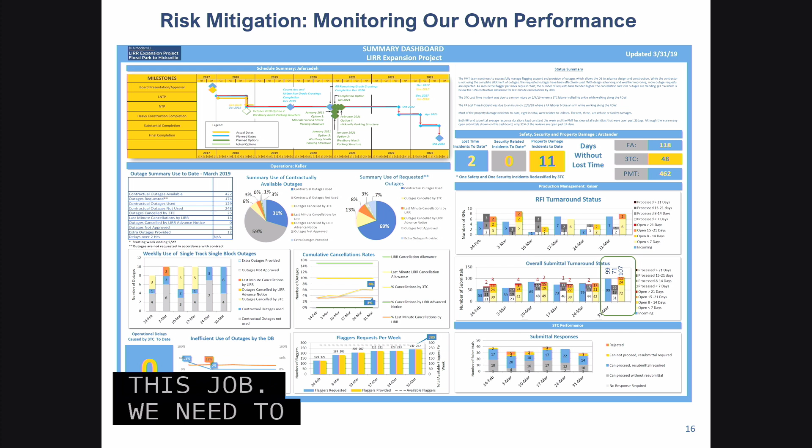Again, I think this is a repeat from January. It is our own performance presented. Whatever is in red on that diagram is a problem. You won't be able to find the red, but there is some. If I could look in the center of that circle, there are little red lines on top of some of our performance, and what that's saying is we have gone over 21 days in our response period for some submittals. As we've looked at the reasons for this, it is all associated with vendor relations. We are taking too long to approve contractors to work on this job, and we need to do something about that. We've added a new resource into the vendor relations office here at MTA. We see improvements for that, but we need to get better as we go along. It's proving an extremely useful tool, and it's flagging up all sorts of issues that we address immediately when we see them, and I would encourage this to be used in many other projects.

Good neighbor incentive - our contractor received 90% of his award for the end of 2018. We've just sent out a survey for the first quarter of this year. We're seeing that the contractor is making great strides to improve his behavior in the community. Our mayors are extremely active in making sure the contractors know what they have to do, good behaviors in the community. I thank our mayors across the corridor for being active in this regard. This is working very, very well.

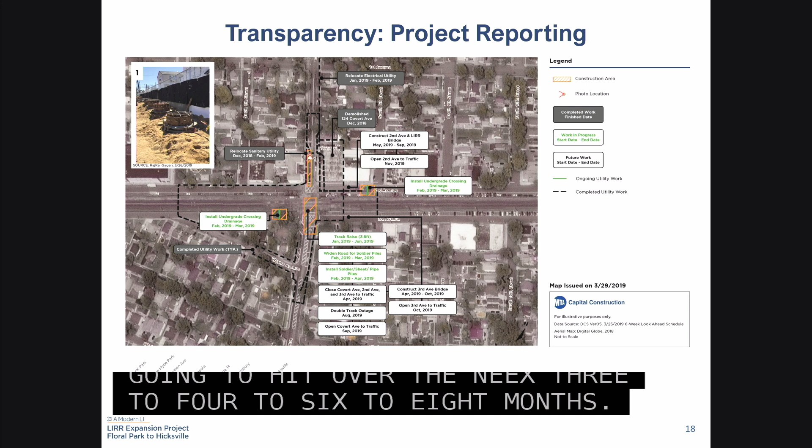Just 2 slides and final. Look, we're aware that the board and the governor are keen on transparency. We want to meet that goal. We are putting this type of report on the web and giving it to the mayors. What this actually is, each element of the project - because it's very hard to understand 30,000 lines of schedule - we're taking each element of the project, doing a little sketch like this, and showing the mayors and putting on the website the dates we're going to hit over the next 3 to 4 to 6 to 8 months. So we are holding ourselves accountable publicly by putting this information out there. We are admitting when we don't hit it, because we'll miss it by a date or two when some utility doesn't quite get there, but we're putting it out there so people can see we're trying and we are being as honest as we can be.

And finally, a little bit of fun if I could, and I hope this works, Yelena.

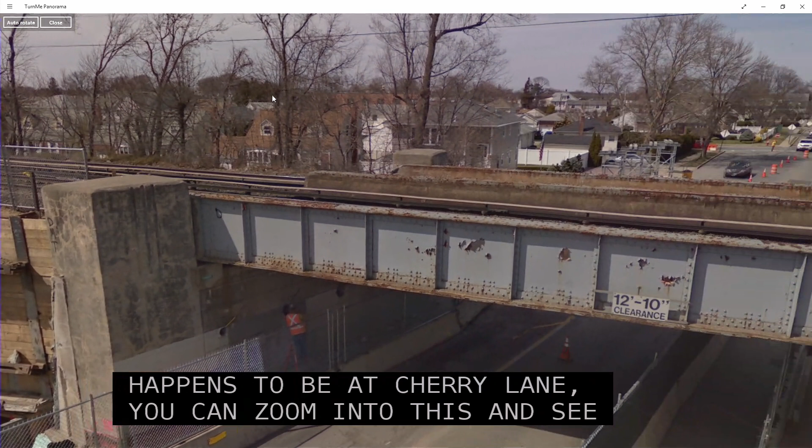Okay, if you spin to the right, Yelena, you can see that the detail of that bridge is to be replaced. And if you zoom into the distance, you can see trestles that are about to be built right beyond that bridge.

That's where the new bridge is being built temporarily. On June 1st, that bridge is going to be slotted into position, and that's when we need our first double track outage.

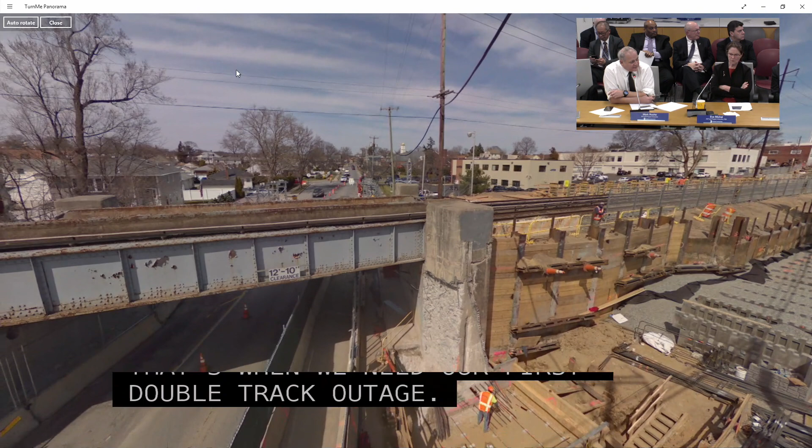Yelena, if you go to the right. So as we spin to the right, you can see the abutment. There's a gentleman down there working on some reinforcement. That is the abutment being expanded to effectively support the third track.

If you look to the right, you can see the concrete that is effectively being put in place, which is one of the retaining walls. That's a 500-foot retaining wall. We were a little bit concerned about our contractor being slow on the retaining walls, but his precast methodology is working extremely well, and he's putting in many units every week.

We put this up there, and we put it on the website for the community because it's hard to see over the wall and hard to really get a full view of what's happening out there. We figure, look, if we're telling you what we're going to do, we're going to show you what we're actually doing and demonstrate that we're meeting our deadlines.

Thank you. So, Mark, good presentation. You made a comment about a fully funded 2020 capital plan and timing. Do you want to expand on that?

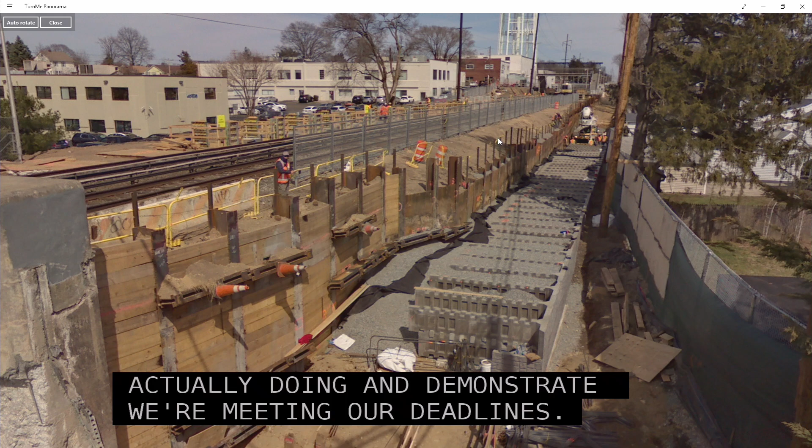Sure. So we have $538 million that's hopefully going to come in the next capital plan. Of that, $270 million must be in place by July of next year. At that date, there's an option in the contract to extend it for no cost or no change in cost and no change in schedule. So we can meet all these dates as long as the board and the capital plan come through with that $270 million at that time.

So when this is finished and you have trains running on 3 tracks here, but only 2 tracks between Hicksville and Ronkonkoma, which is an improvement from the 1 track it was for a while, where do the extra trains go? Will you send some down the central branch to Babylon, or where will they go? Some additional trains to Huntington?

I'm not sure I can answer that question in detail, to be honest with you. I believe that's my Long Island Railroad colleagues' area. What I will say is that the service plan is being worked on to make sure that we have all that worked out by the time we get there. I can come back to you at the next meeting and tell you about that.

Okay, Mohammed. Good afternoon, Mr. Chairman, members of the board. My name is Mohammed Mohammedinia. I'm the independent engineer on the Long Island Railroad expansion project. We oversee the agency, and we're here to report to the board whether we agree with the agency's report or not.

The IEC report on the Long Island Railroad expansion begins on page 81 of your CPOC books. For schedule, the IEC has reviewed the project schedule and agrees with the schedule logic. Significant increases in contractor resources are required to accomplish 2019 planned work, including installation of 18,000 linear feet of retaining wall and the work associated with the crossing eliminations.